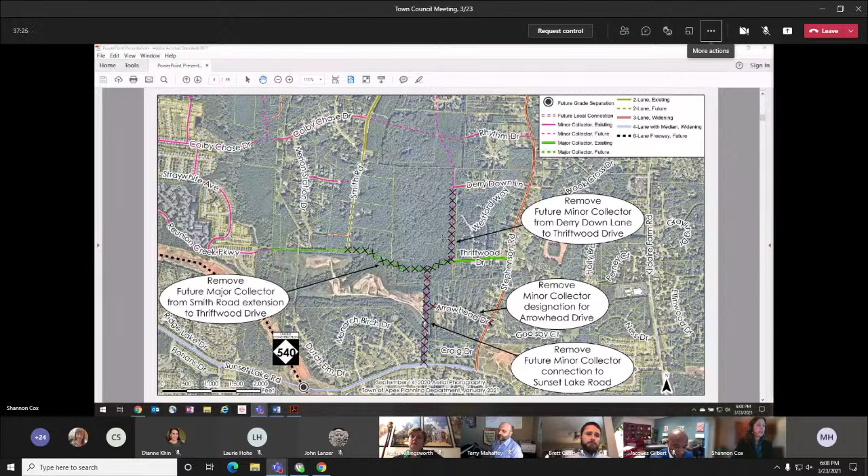The next amendments are to the bicycle and pedestrian system plan map. For the most part, these are just consistent with the removal or proposed removal of future roadways on our plan. This reflects removing the future side path from the major collector street and the minor collector street here and here as well. The difference is a proposed addition of a future greenway that would extend from Smith Road Extension over to the proposed school site, as well as over to Middle Creek Greenway.

This would provide for a future bicycle and pedestrian connection from the west to the proposed school, which is consistent with our Safe Routes to School objectives.

You don't see a connection from here over to Thriftwood. There are proposed zoning conditions that would provide for a pedestrian connection from the Greenway over to Thriftwood Drive, and you'll hear about that with your next agenda item.

These were also reviewed with the same departments as well as Parks, Recreation, and Cultural Resources, and all were supportive of these proposed amendments. In addition, the Planning Board unanimously recommended these for approval as well. And I'm happy to try and answer any questions that you may have.

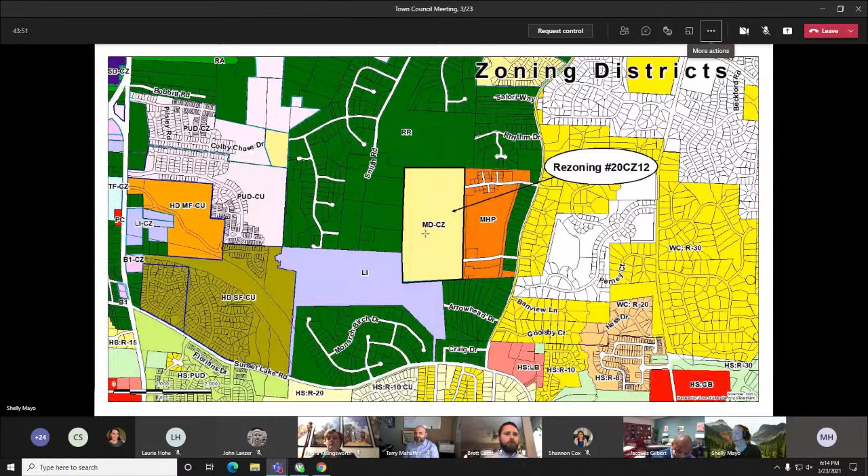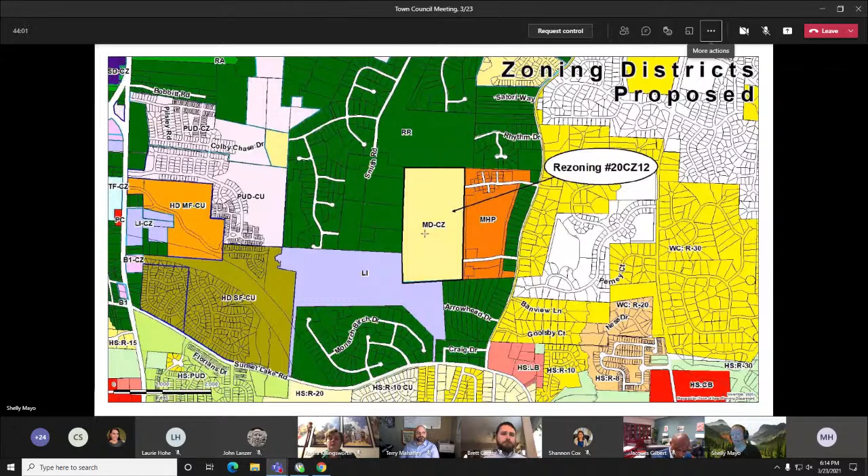The property is currently zoned medium density conditional zoning, but it doesn't have school uses listed in those list of permitted uses. So the applicant is proposing to amend that zoning district to add those uses in so that a school could be built on this site. This is consistent with the 2045 land use map, which designates this site as a school.

The applicant conducted a neighborhood meeting on October 27th, 2020. There was no one in attendance. The neighborhood meeting report is attached. And the school system is proposing the following uses.

School, public or private. Communication tower, camouflage stealth. Communication tower, public safety. Wireless communication facility, wireless support structure, and church or place of worship. These are consistent with other schools in the town, and similar uses have been proposed on those as recently as the Apex Friendship Elementary School rezoning.

The applicant's also proposing several conditions. I'll read those off. Condition 1: this project shall preserve trees measuring 18 inches in diameter at breast height or greater to the maximum extent reasonably possible. 2: in compliance with the UDO and to optimize the survival of landscaping, an extension of up to 6 months' time may be provided for installation of landscaping after a certificate of occupancy would otherwise be issued.

3: to support reestablishment of forest, a reforestation seed mix shall be used in disturbed areas with slopes of 3 to 1 or less, which are not located within RCAs or SCMs. To expedite growth and avoid erosion, a slope stabilizing mix with conservation seed mix shall be used on slopes greater than 3 to 1 but less than 2 to 1, which are not located within the RCAs and SCMs.

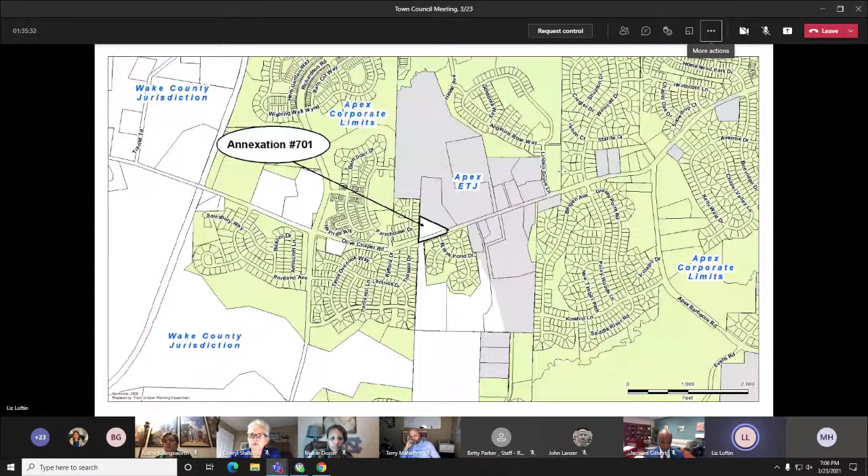The applicant is proposing to rezone to planned unit development conditional zoning. The proposed PUD is designated as medium density residential on the land use map, and the PUD is consistent with the land use map designation.

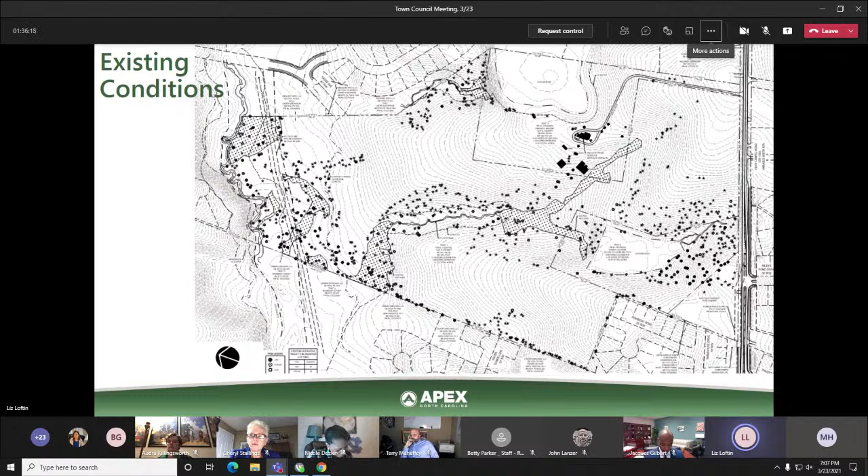The site consists of 3 parcels on the north side of Olive Chapel, totaling 79.79 acres. The site also has 1 single family residence, several barns and sheds, and 2 existing ponds. Along the northern boundary, there is a 100-foot stream buffer from Reedy Branch. The applicant conducted a neighborhood meeting on October 29th, 2020, and a copy is included in the staff report.

The applicant has limited the uses to single family, accessory apartment, and townhouse. The applicant has limited the density to 3.5 units per acre. This was a reduction from the staff report that went out with the town council agenda. It was 4, and the applicant has reduced it to 3.5 units per acre.

A full list of the proposed setbacks can be found on page 3 of the staff report. The proposed PUD meets or exceeds the buffers required by the UDO. They're proposing a 20-foot type A on the eastern and western. Along Olive Chapel Road is a 30-foot type E, or if the homes along Olive Chapel Road are not alley loaded, the buffer shall be a 30-foot type B buffer.

The applicant has also included an additional condition that the 100-foot riparian buffer to the north will include an additional 100-foot buffer to be established, and this additional 100 feet may include utilities, trails, or other active or passive recreation. RCA shall meet the requirements of the UDO.

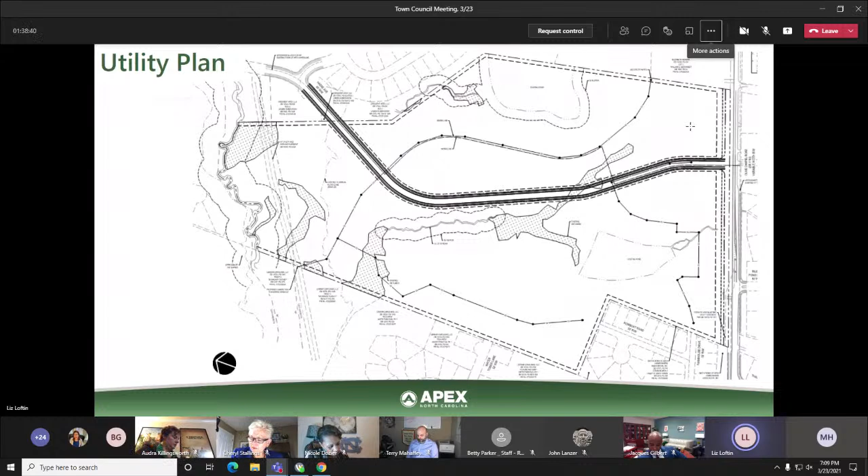The town of Apex is proposed to provide water, sewer, and electric services. A full list of the architectural conditions can be found on page 4 of the staff report and are generally consistent with the surrounding subdivisions.

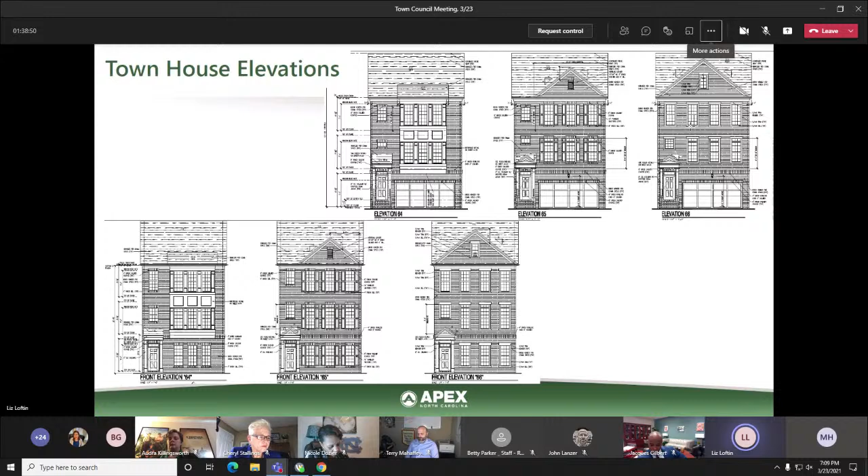A full list of the transportation conditions can be found on page 6 of the updated staff report. To summarize, Haas Avenue will be constructed between Olive Chapel and the terminus at the north. Olive Chapel Road will be widened to include a 100-foot eastbound left turn lane and a 100-foot westbound right lane with appropriate deceleration length. A 6-foot bike lane and 5-foot paved shoulder will be located on the north side of Olive Chapel Road.

The applicant has also included a condition that the alleys may be proposed to vary from town standards in order to accommodate water and sewer utilities. There will be no private driveways permitted along Olive Chapel Road.

The development plan will incorporate sidewalk infrastructure on Olive Chapel Road. A trail will serve as a connection from the western portion of the community to the Reedy Branch Greenway. Sidewalk will be provided on both sides of the street, and there will be a 10-foot side path provided along the minor collector road. The applicant has also included a condition that a 5-foot sidewalk shall be constructed on the western limits to connect to the Linden subdivision, and a full wording of that condition can be found on page 6 of the staff report.

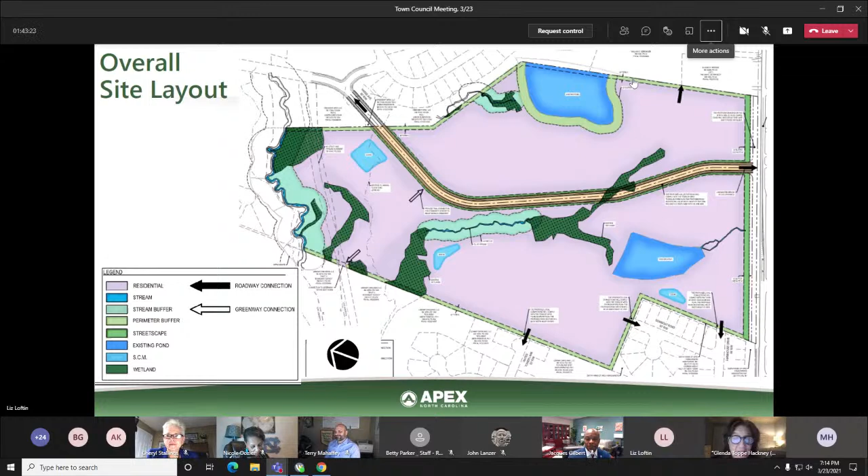I am here tonight representing the applicant, and we have put together a slideshow that I would like to go through. It does go over some of the things that Liz has addressed, but we feel it's important to hit all the points about our project because we feel it is unique and offers the people who will hopefully live here an environment that will be a little different from other communities in Apex.

First, I would like to thank staff, council, and the neighbors for their input. We've really appreciated it, and we have made changes that we feel are better because of the input we have gotten. So with that, I am going to speak, and Brendie Vega is going to control the PowerPoint presentation. We are tag teaming tonight.

As you all know, the item is the Hackney PUD, and the next slide shows the location of it. The property is located off of Olive Chapel Road, and you can see the different developments around it: Sweetwater, Pricewood Farms, Woodridge, Linden, Smith Farm. Across the street is Holland Crossings. All the developments I've addressed are either zoned as a PUD or medium density, so I just wanted to point out the current zoning for those properties.

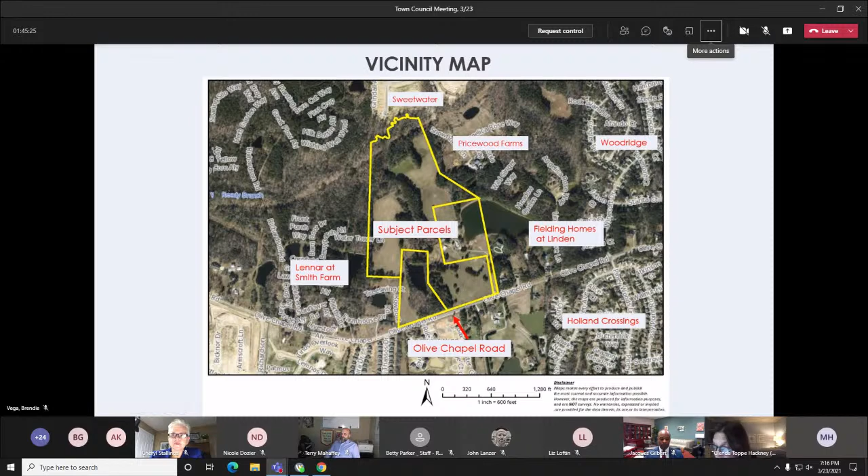As staff pointed out, on the 2045 land use plan the property being considered for rezoning is designated as medium density, which is 3 to 6 units per acre. Originally we had proposed 4 units per acre, but after discussions with various council members and residents, we proposed a change in density, going from 4 units per acre to 3.5 units per acre. The total units based on the acreage is 279, and right now we see the breakdown being 60% townhomes and 40% single family homes.

The development is consistent with the future Apex land use plan, and this slide just repeats what I have mentioned. We feel that the designation of medium density does act as a transition between the higher and lower densities, and that the proposed Hackney development proposing medium density housing is appropriate for this location.

One of the reasons why we reduced the density, and it's a discussion that just took place, is for schools. We understand and received a letter that the town received from Wake County showing that the schools in this area are at capacity. What we wanted to do is show you examples of public schools within a certain radius of our site.

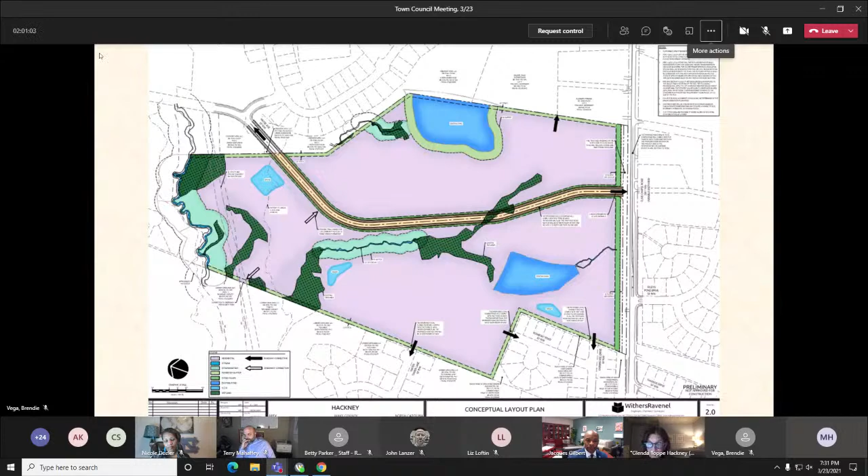And again, I didn't know exactly how much time I had. So again, thank you for letting us address the council. I am here to answer questions, as is several other members of our team. We've got a group of people on the line who can answer questions that might be more knowledgeable than I am. But again, thank you very much. My apology, I didn't give you the time limit.

No, that's okay, I appreciate your presentation. I tend to talk a lot. Well, not a lot, but I do talk. It's all good. How you doing, Brendie? Good to see you. I'm doing well, thank you, Mayor. All right, great, great. Any questions from council?

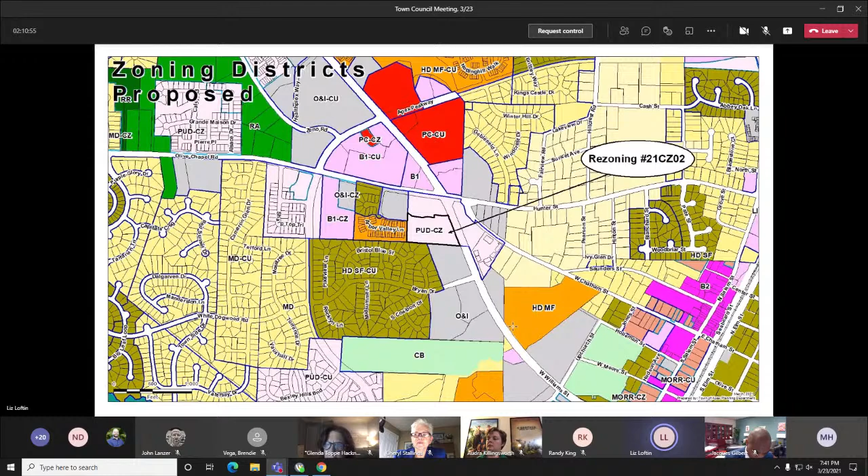This is rezoning 21CZ02. It is located within the Apex Peakway. The property to rezone is on the west side of Williams Street between Walgreens and the post office. The subject property was originally rezoned to planned unit development conditional use in 2002. The applicant is proposing to rezone to planned unit development conditional zoning.

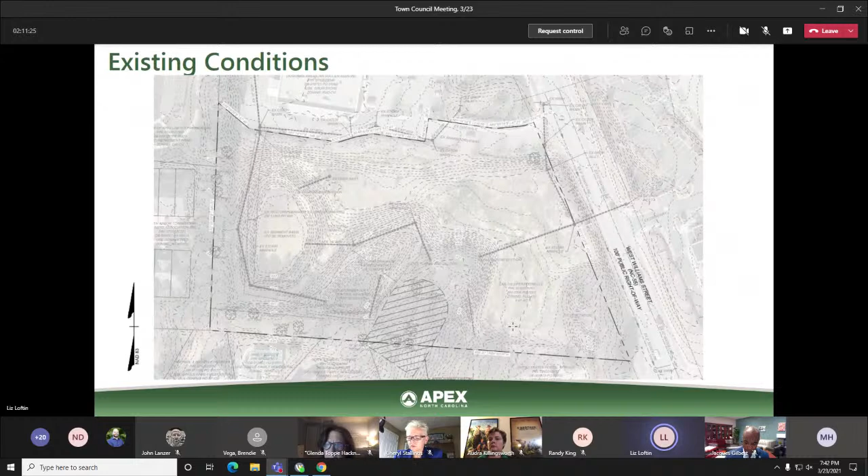As you may recall, the 2045 land use map was recently amended and designates the subject property as high density multifamily and commercial services. The proposed PUD is consistent with the land use map designation. The property was previously cleared and currently is vacant. A stream determination was conducted last month, and it was determined that the stream is a 50-foot intermittent stream. The applicant conducted a neighborhood meeting on December 15th, and the neighborhood meeting is included in the staff report.

The applicant is proposing one use, which is age-restricted multifamily with a maximum density of 17 units per acre. The applicant is proposing the maximum height to be limited to 3 stories and 48 feet. The maximum building size shall not exceed 96,000 square feet. The building and vehicle setbacks have been updated and can be found on page 3 of the updated staff report.

The proposed PUD meets or exceeds the buffers required by the UDO. The buffers are the same as the current PUD, with the exception that the applicant has increased the landscaping opacity along the western boundary from a 20-foot type B to a 20-foot type A buffer. Along the south is a 40-foot type A, and along West Williams is a 30-foot type B. The RCA requirement on this parcel is approximately 60,000 square feet in the current PUD, and the applicant is proposing to maintain 62,162 square feet of RCA.

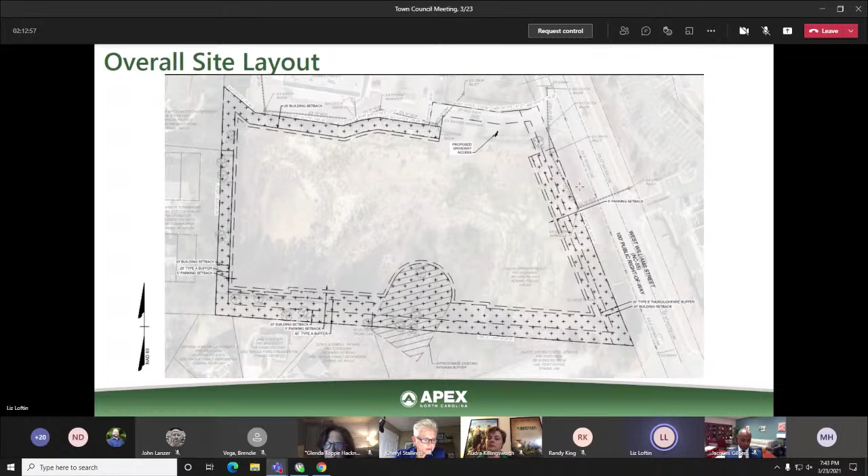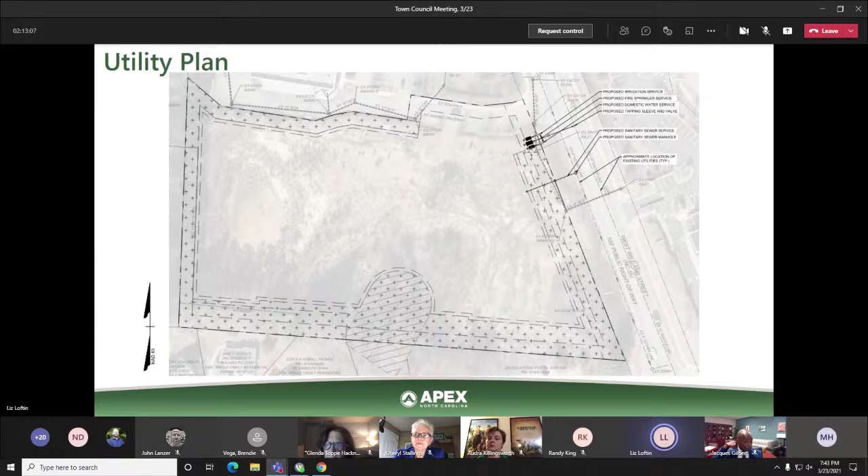The Town of Apex will provide water, sewer, and electric service. This property is proposed to connect to existing services in West Williams Street. If the rezoning is approved, the developer will submit a major site plan that will be reviewed by town council. The main exterior building elevation shall be brick and vinyl lap siding.

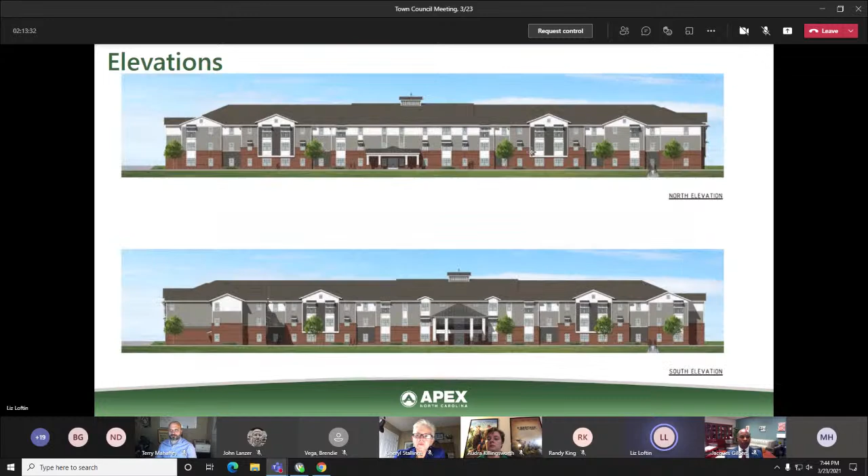The applicant is requesting a reduction in the parking requirement. Since this project is age-restricted senior apartments, their requested reduction is based on the applicant's experience with similar developments in the region and the planned transit stop that will be in close walking distance.

It is anticipated that the Town of Apex will install a new bus stop for Go Apex Route 1 in front of the post office. The applicant has provided a condition that if the town has completed those improvements prior to CO for this project, they will provide a new shelter and trash receptacle for that bus stop.

The proposed PUD is consistent with the Apex Transportation Plan. The proposed development will have access to both West Williams Street and Olive Chapel Road through joint access with the Walgreens development. The applicant has also provided a condition for vehicular cross-access easement. A full wording of that condition is on page 6 of the staff report. If the post office were to redevelop in the future, the cross-access would be in this area.

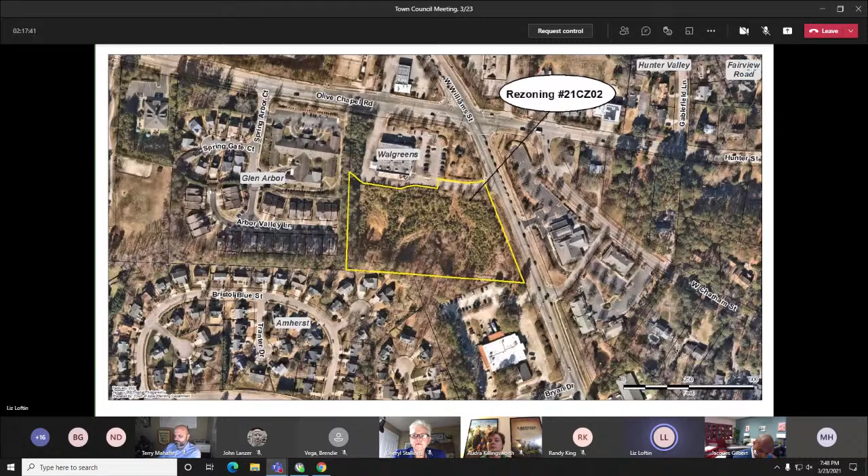Good evening once again. Since the affordable housing plan is so new to all of us, we wanted to spend a few extra minutes going into a little bit more detail regarding the consistency of the proposed rezoning with our affordable housing plan adopted just last month.

The plan also notes that we have limited options for seniors to age in place, and as Liz mentioned, they're offering age-restricted units with at least 80% of occupied units occupied by at least one person 55 or older, so that addresses that need as well. The plan notes that we do not have a proportional share of the region's subsidized rental housing, primarily due to the high land costs in Apex, as well as limited access to transit, which makes it difficult to get those low-income housing tax credits, or LIHTC, financing.

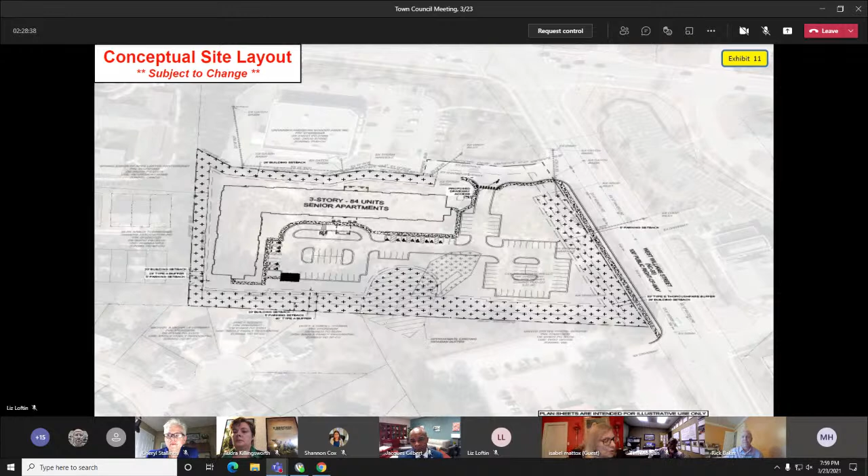So I also wanted to go through a few neighbor issues. We've had many comments and requests from the neighbors. We had 2 lengthy Zoom calls last week and have made numerous changes to the case, including we already had a commitment that 80% of our residents would be 55 and older, but now we've also gone further to say no permanent residents will be under 45 years old.

Liz told you about the several lighting conditions we've added. We've required the stairwells to be fully enclosed. We've required soft close exterior doors. We've prohibited cross access to Amherst and Glen Arbor at the neighborhood's request. We've prohibited exterior ATMs. We've prohibited drive-through window service.

At present, we plan surface parking and we plan 3 stories, but it won't go to 48 feet, which is the same height requirement as the prior zoning, the existing zoning conditions. Maximum building square footage is 96,000. That'll be 3 32,000 foot stories.

And the buffer, we have increased the setback against the Amherst to a 40-foot buffer plus 15-foot setback from building and vehicular surface areas. And we will use plantings to achieve the opaque buffer along the Amherst line rather than a solid wood fence at their request.

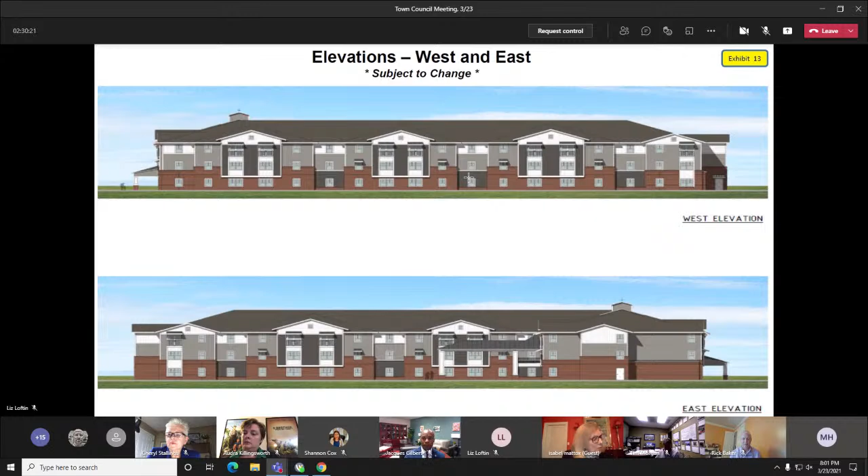And if you compare that to the combination of uses, and all of these uses would be permitted on this site, you would get 835 from a medical office, 966 from a shopping center, and a fast food restaurant of 1413. So that's significant, about 10 times the number of trips that could be generated under the current entitlement versus our 312. So we're proposing a use that will drive way less traffic.

So in conclusion, we do think this proposal is reasonable and in the public interest for a number of reasons. First, the town of Apex, like many communities, desperately needs new affordable housing, and in particular senior housing, to help our vulnerable populations deal with the rapidly increasing cost of housing. This is a particularly good site for this use because of its close proximity to pharmacy, grocery stores, medical resources, and transit.

We are providing good buffers and have made many other concessions to the adjacent neighbors. The request is consistent with the 2045 land use map, the transportation plan, and the affordable housing plan. The approved 2003 zoning did not lead to any development despite several attempts. This proposal will generate far less traffic and maintain the same or greater buffers, setbacks, greater RCA, and the same maximum height as the 2003 plan.

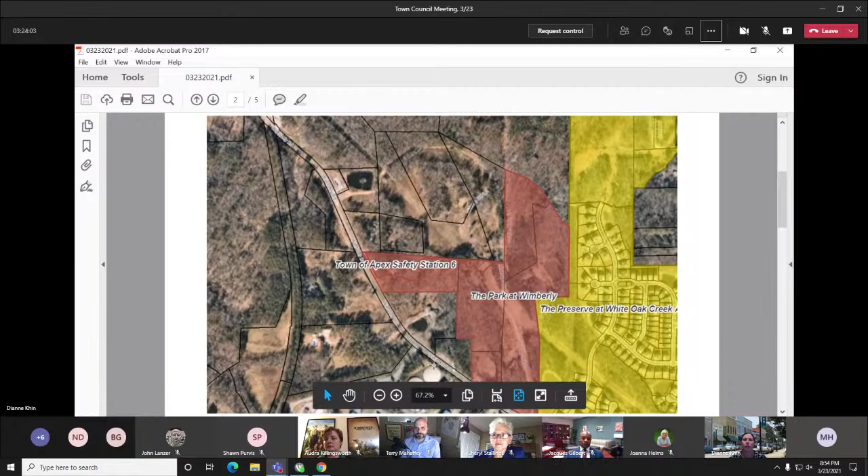So just to orient you to the site, Wimberly Road is in our northwest quadrant of our town, and it is located across the street from the water treatment plant that we share with Cary. This is the Park at Wimberly, and this portion of the park is where Public Safety Station 6 will be located.

All the properties shown here in red are town park properties, and the easement we're talking about actually comes up in this direction into the park property. So I'll show you where this arrow is pointing. This is the old plat, Book of Maps, 1987, page 2038. It was an easement granted in favor of Lorraine Mills back in 1993, and when the town bought the property in 2017, it conveyed over to the town. So we do now have access directly from Wimberly Road.

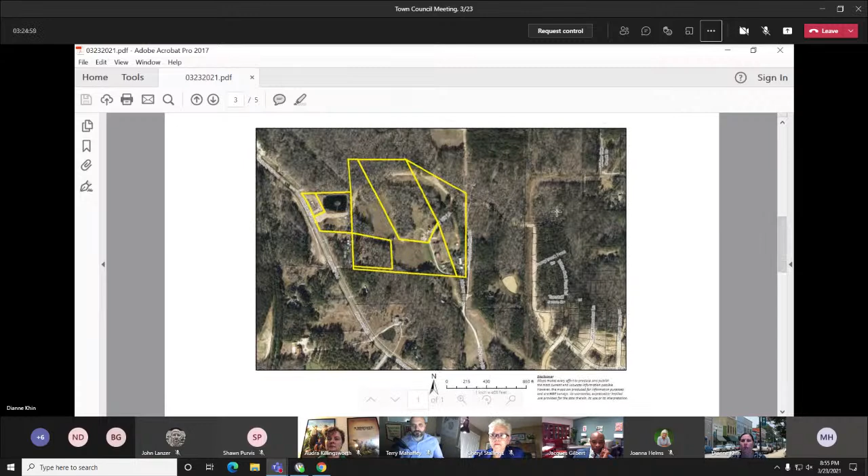I want to go down a couple slides here. This is the Preserve at White Oak Creek subdivision, and we do have a greenway easement that connects through here for pedestrian connectivity from the subdivision to the park. So there would not be a need for the easement that basically goes in this direction. When the subdivision's there, we wouldn't be able to use it anyway. So they are requesting a termination of the easement, so that they can close on the property next week. And I don't know, Lori, if you had anything to add at all.

No, I think you covered that very well. Okay. All right, I haven't done one of these before.

And you did it on short notice too.

Staff does recommend that the termination be approved, and then Lori will work with their attorney, Brian Sutliff, to finalize the paperwork. But I think a vote is needed in order to authorize the town manager to sign. Yeah, that's what we'd like to do, is have the town manager authorized to sign.

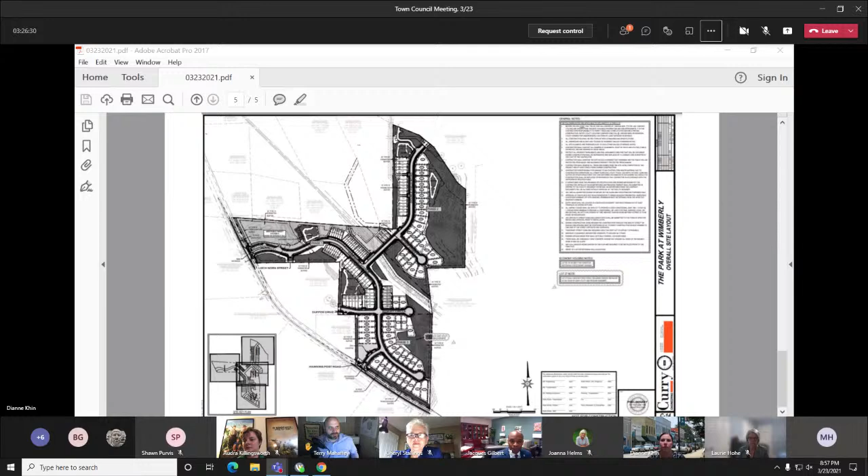Thank you, Mayor, and thank you everyone. This is kind of interesting. How do we even find out the easements that are on a given property? I'm looking at the GIS, the county has GIS there with the Wake iMAPS, and I don't see it listed there. Do you have to go to the Register of Deeds and dive into the book and look to see every single one recorded in the past 100 years?

Yes, this is why you hire an attorney to do a closing for you when you purchase real estate. The developers of the adjacent property are trying to close next week, and through the title research, the attorneys found the easement located on their property, and the title company is the one asking them to have the easement terminated.